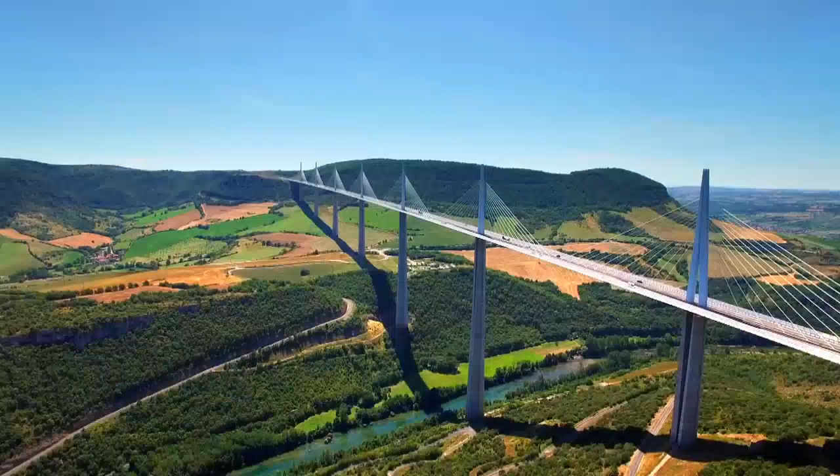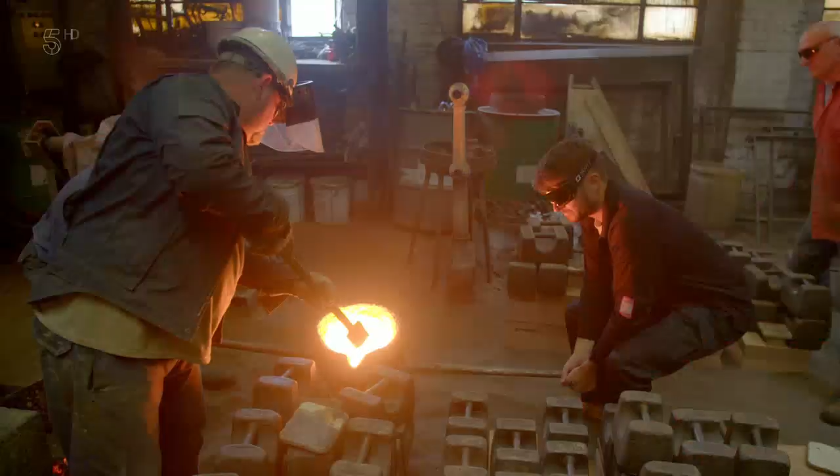Majestic, dramatic, awe-inspiring. These are the bridges that are worldwide icons, as well as engineering marvels. She's beautiful. Each of them broke new ground. The first, the biggest, the longest, and the tallest. I'm Rob Bell, an engineer, and I'm on a global adventure to discover how and why these magnificent structures were built, and to learn about the sweat and the sacrifice that went into their construction.

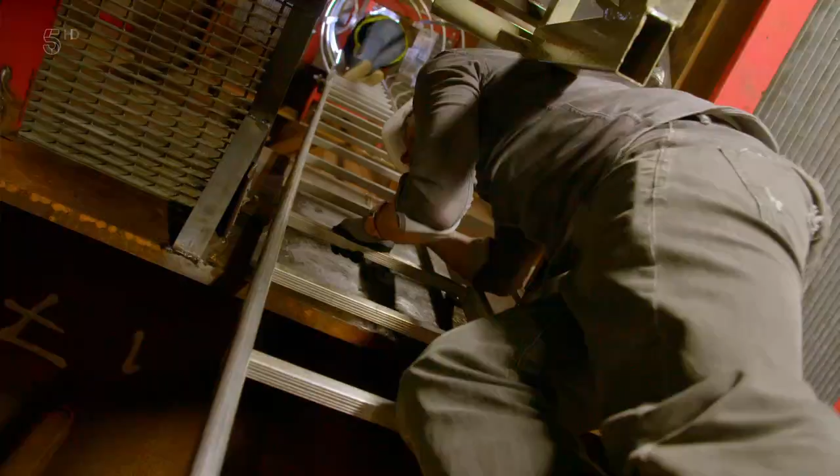Well, hey! I'm going to take you closer than ever before. Oh, this is magnificent. Inspect them from every conceivable angle. Oh, yeah. And meet the men and women who keep them working round the clock, no matter what. Check this out. These are the world's greatest bridges.

Sydney, Australia's oldest and largest city, and one of the world's most beautiful waterfronts. It's known as the Harbour City, and the very best way to arrive here has to be by boat, just as the first European settlers did some 230 years ago. Sail into the harbour and you'll pass two world-renowned structures, the Sydney Opera House and the Sydney Harbour Bridge.

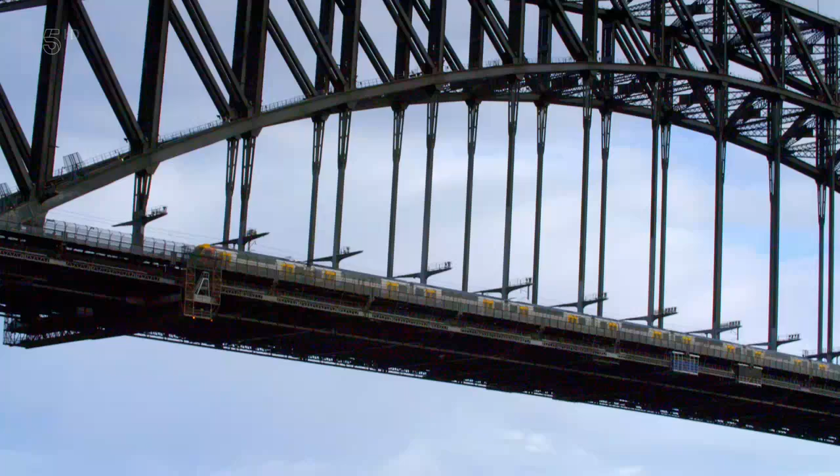Rising to a height of 440 feet, it's the world's tallest steel arch bridge, connecting the northern suburbs of Sydney with the city centre. It weighs more than 39,000 tonnes, spans 1,650 feet and is 160 feet wide. It carries 8 lanes of traffic, 2 railway lines, a footpath and a dedicated cycle path. Every day, more than 200,000 cars travel across it.

When it opened on the 19th of March 1932, it instantly became a world-renowned landmark. And since then, millions have passed across it, over it, and under it. Like a giant, triumphant gateway, it signals your arrival here into Australia. The bridge had taken a century from first proposal to completion. The construction itself lasted 8 years and cost £6 million. And its arrival marked a new stage in this young city's remarkable evolution.

Sydney was founded in 1788 when 11 British ships landed, right about here. On board were more than 1,000 settlers, including some 850 convicts. The captain described this as, without exception, the finest harbour in the world. He named it Port Jackson. Within 4 years of the first shipload, another 4,000 convicts arrived. They were followed by the first free settlers from Britain, who travelled here to make a new life.

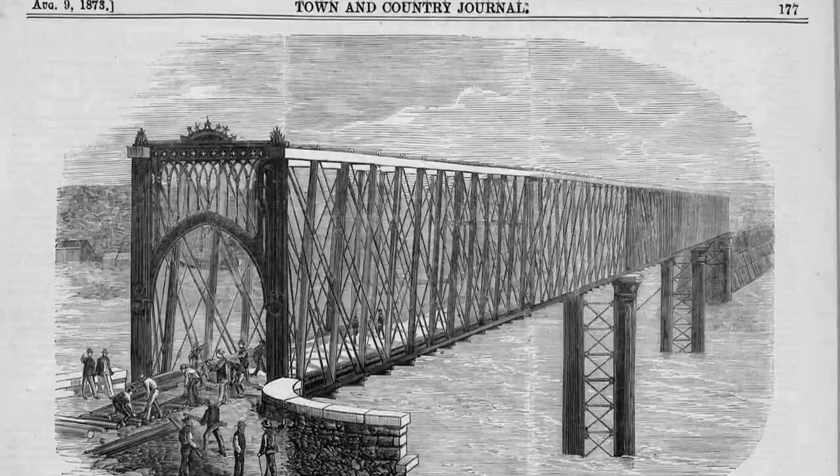This city's greatest natural transport advantage, its harbour, had become a transport disaster. The solution, everyone knew, was a bridge between the south and the North Shores. In fact, this wasn't a new idea. Throughout the 19th century, various bridge proposals had been submitted, but had all been rejected by successive governments. The designs were considered too fantastical, too unsightly, too much of a risk to shipping, or simply too expensive. But by 1900, a solution was needed urgently. So the government launched a worldwide competition to find the best design and construction plan.

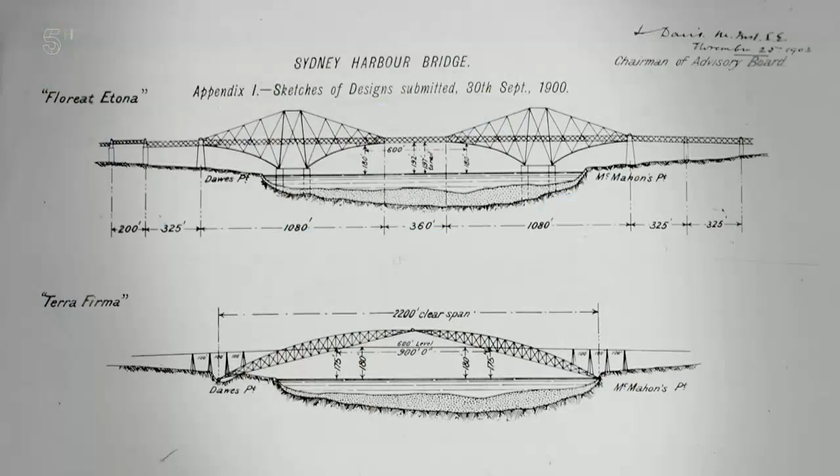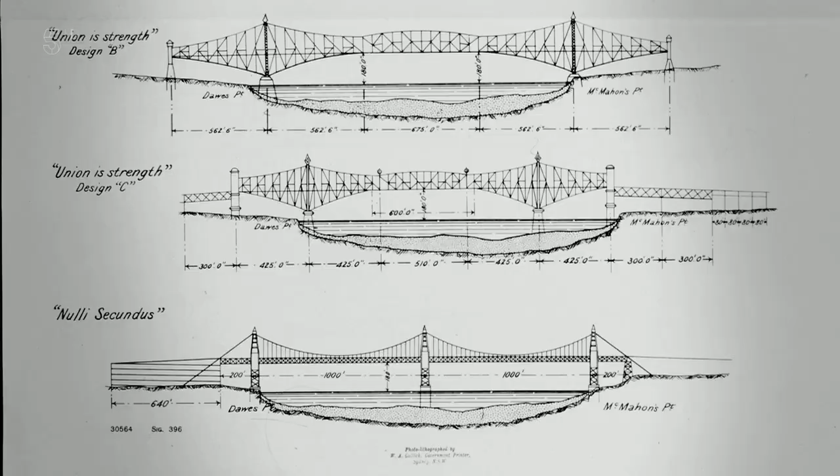30 of the top entries were put on public display here at the Queen Victoria building. Once a market, but now a smart and chic mall. But the judges deemed them all to be unsatisfactory and too lacking in detail. The only answer? A second competition, this time with a much more detailed brief. The bridge had to allow a clearance of 170 feet above the water. The main span needed to be 1,192 feet long, and the deck a minimum of 60 feet wide. It also needed to accommodate 2 railways, 2 roadways, 2 tram tracks, and 2 footpaths.

It was this submission from Norman Selfe that won in the end. A cantilever bridge, a design where the beams are anchored at just one end and supported by large towers. The judges advised the government that construction should start immediately and be completed within 5.5 years. But then a change of government brought the entire project to a grinding halt before it even got started. The designers were furious. Over a period of 3 years, they'd invested a huge amount of time and money into what they described as the Sydney Bridge guessing competition, and all for nothing. And much to the anger of the people, it was looking like Sydney Harbour would never get its bridge.

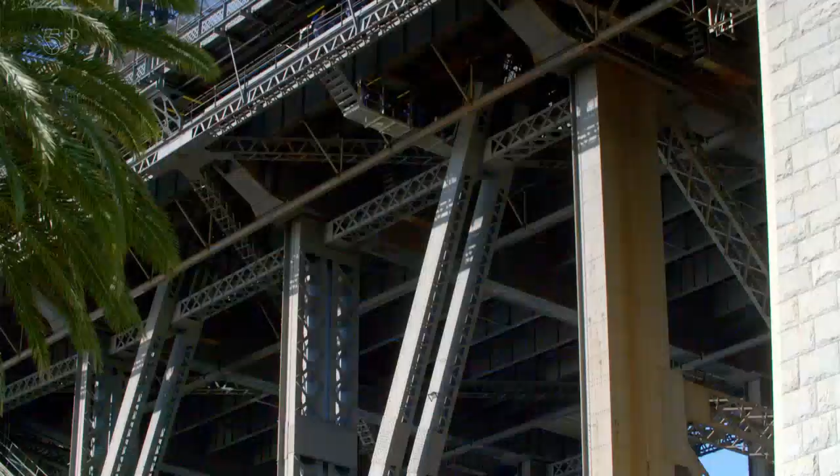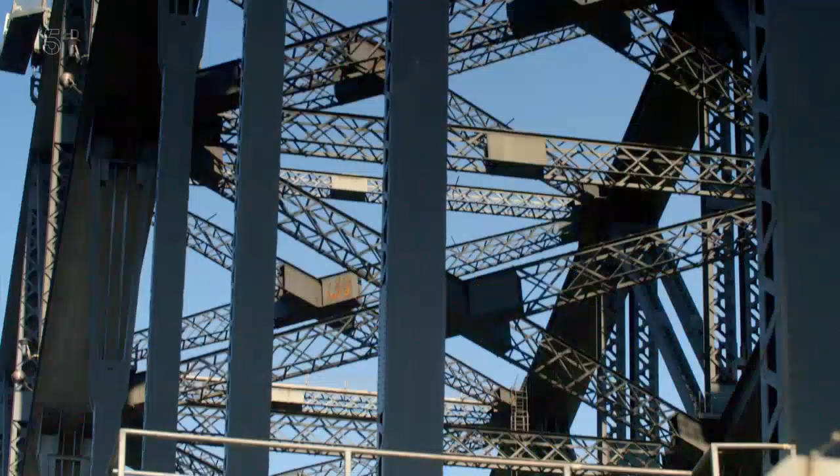The Sydney Harbour Bridge, once the highest man-made structure in Australia and still the most famous. Walking across, you get a real appreciation of the scale of what's here. But it's not just the size, it's solidly built too. And you get a real sense of that looking up. The width of the steel plates that make up the arches, all the truss work between the arches. Not to mention the imposing granite-faced pylons at each end.

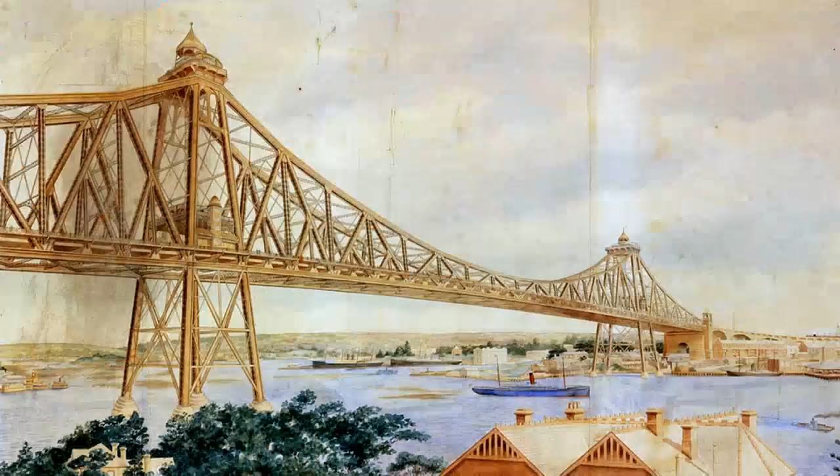It's seriously impressive. But at the beginning of the 20th century, it seemed unlikely this magnificent bridge was ever going to be built, as the project was hit by one delay after another. Norman Selfe's design, now more than 10 years old, was outdated, and following his death in 1911, the doors were left wide open for a new generation of bridge designers. The bridge we see and admire today might not have existed if it weren't for the drive and the determination of one man, John Jacob Crewe Bradfield. And even if it had gone ahead without his involvement, it would certainly have looked very different.

Bradfield began his career as a draftsman. In 1891, he joined the New South Wales Public Works Department and went to live on Sydney's North Shore. That meant travelling to work by ferry, so he understood commuters' demands for a bridge all too well. As an advising engineer on the abortive bridge design competition, he'd witnessed what a farce it had been. But in 1912, when the government took another look at building a bridge, he was determined to make it happen.

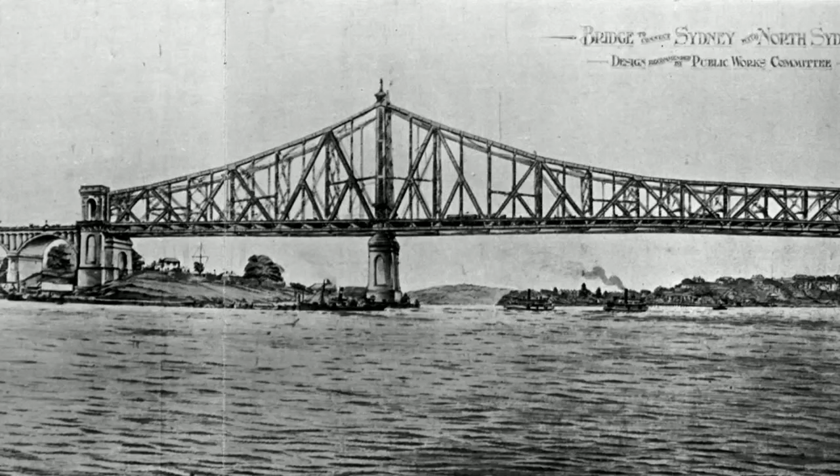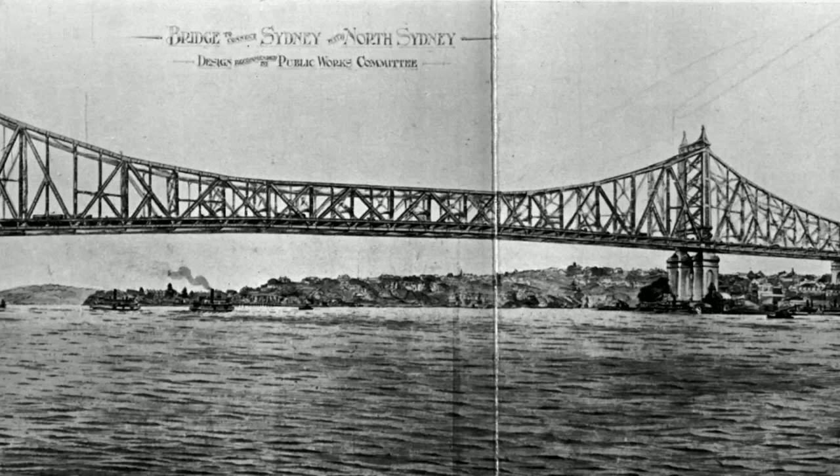After being appointed chief engineer of the Harbour Bridge and Metropolitan Railway construction, Bradfield submitted 2 designs himself. In 1913, one of these was accepted. It was a cantilever bridge, with each span built out sideways from huge piers. Steel trusses were to be used to give it strength and rigidity. Connecting Dawes Point on the south shore to Milson's Point on the north, it would carry 4 lines of railway, 2 roadways, and a footpath.

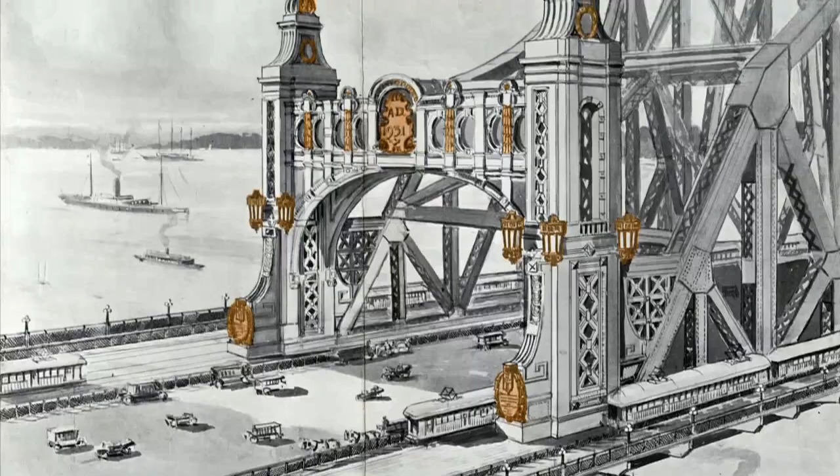Although still a cantilever design, it was far more ambitious than any past submission. The budget was agreed, the design was agreed, and the time frame was agreed. But then, the First World War broke out. The money for the project was diverted to the war effort, and once again, the bridge was cancelled. It was to take a further 8 years before the state government were once again in a position to consider Bradfield's proposal. Luckily for them, Bradfield was a patient and determined man, something his grandson Peter remembers well.

I think he knew how important it was to weld the city together, to get the east and the north and the south and the west together, and the bridge was absolutely essential. He was a visionary in many senses, always extremely meticulous in everything he did. He didn't have a localised view of things, he had a national view of things.

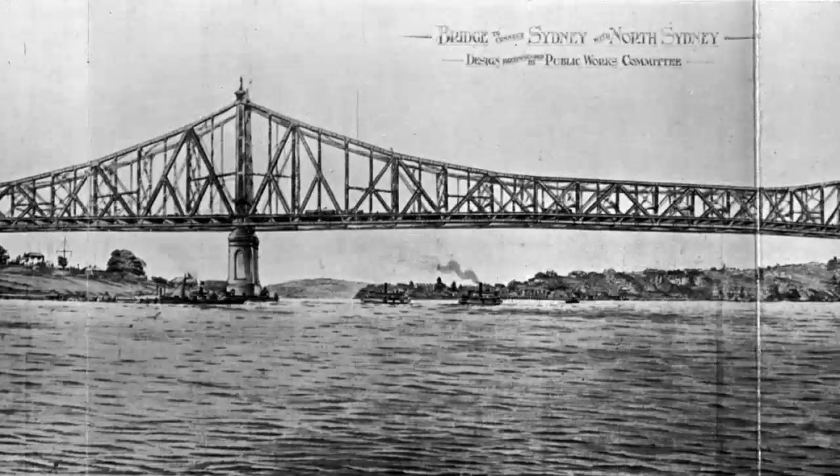So dedicated was Bradfield that he travelled the globe to meet the world's top bridge-building companies, learning all he could about the latest construction technologies and techniques. When he returned home, he was no longer wedded to his cantilever design. Instead, he asked the government to accept submissions for an arched bridge.

The main reason Bradfield changed his mind was a practical one. Arches are naturally incredibly strong, and engineers have been using them since ancient times. And nature's been using them even longer. Take this eggshell, for example, or half an eggshell. The shape of it creates a natural arch. And it's incredible for something so small and so thin, how much force it will take before it starts cracking.

Let me show you. Right. There we go. Well, it easily takes the weight of the tray, but let's load it up. Bottle of water here. Let's pop that on top. It easily takes the weight of 1 bottle of water. All right, let's try another one. 2 bottles of water, easy peasy. It's the arch that's taking all of that force. Because I'm trying to compress it, those forces pushing down are taken out through the sides of the arch, or through the structure of the eggshell, and into supports below, or the table in this case.

3rd bottle, let's have a look. 4th bottle, let's see what happens. Taking this up to 2.4, almost 2.5 kilograms of weight now. It's still staying strong. Let's try a 5th bottle. And this is going to take it up to 3 kilos. Will it take it? Our eggshell there took 5 bottles of water, but not quite the 6th. That's 3 kilograms of weight it could take, and all because of that arch shape. It's definitely smashed.

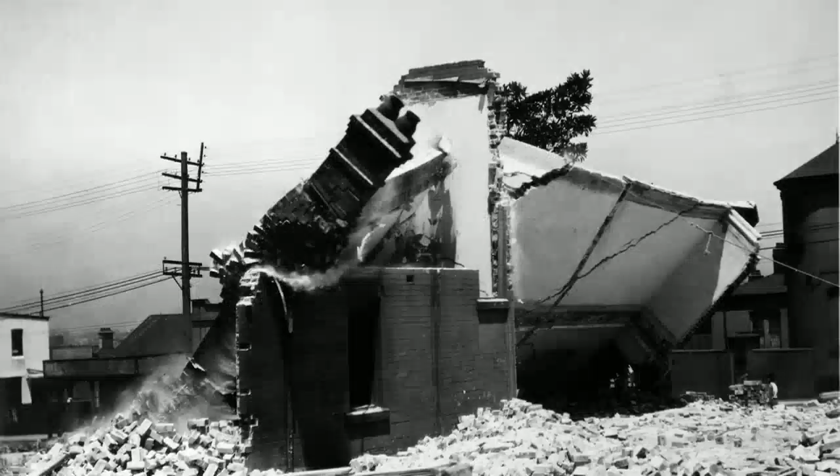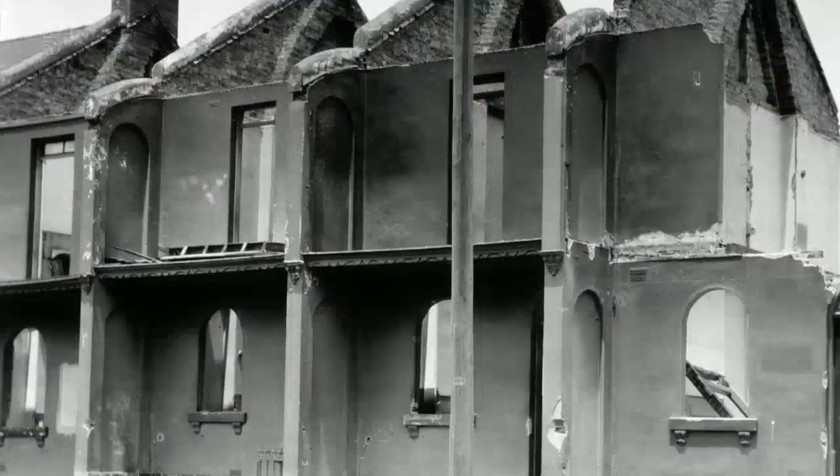Some people wrote letters to the government. This one's from a Mr. Lockhart, an 82-year-old who stood to lose his furniture business. He writes, "Dear Sir, my wife wrote some weeks ago RE compensation for loss of home and means of living. In reply, you stated that all the department could grant would be the cost of cartage. The amount is small, but would be very acceptable, as we have no means and are both too old to go out to work."

Another letter, this one from a Mrs. Pitcairn, a widow whose daughter taught music at home. She writes, "My one desire is sufficient to get a home again. Indeed, since we lost our home, we've had to sell many things for necessities to keep out of debt." She goes on, "Through the bridge, everything is taken from us. At this time, I had only one wish, to take my own life, and only my religion held me back."

Though some people in the government may have been sympathetic to these pleas, they were afraid of setting an expensive precedent. A blanket policy was laid out. There'd be no compensation.

Over on the South Shore, in an area called the Rocks, the residents had even less sway. It was this area where the poorer, less fortunate members of society made their homes, packed with tiny bars, brothels and hovels. The government wasted no time driving these residents from their homes before auctioning them off to building supply merchants who demolished them. When it came to the government's shiny new bridge, it was far more concerned with what it would look like than the effects on the local population.

Well, Bradfield had drummed up interest in the project during his round-the-world fact-finding tour, and he'd since received more than 20 designs from companies based in the United States, in Britain, in Canada, as well as here in Australia. And on the 24th of March, 1924, he made his decision. He awarded the contract to the English firm Dorman Long and Company and their consultant designer, Sir Ralph Freeman.

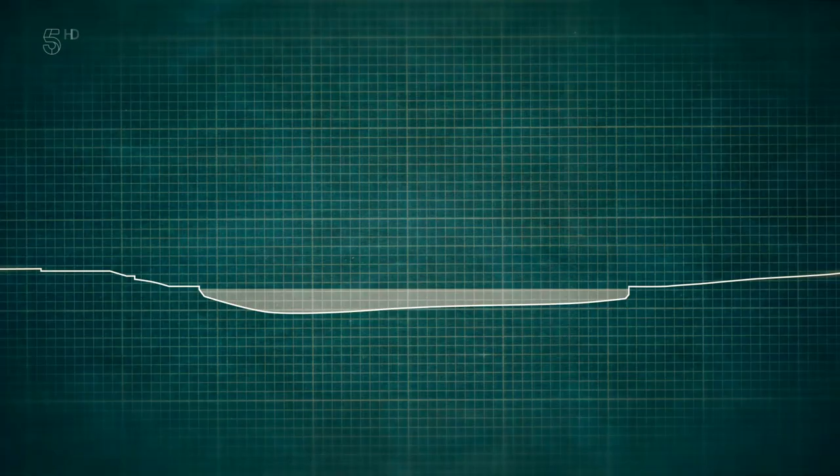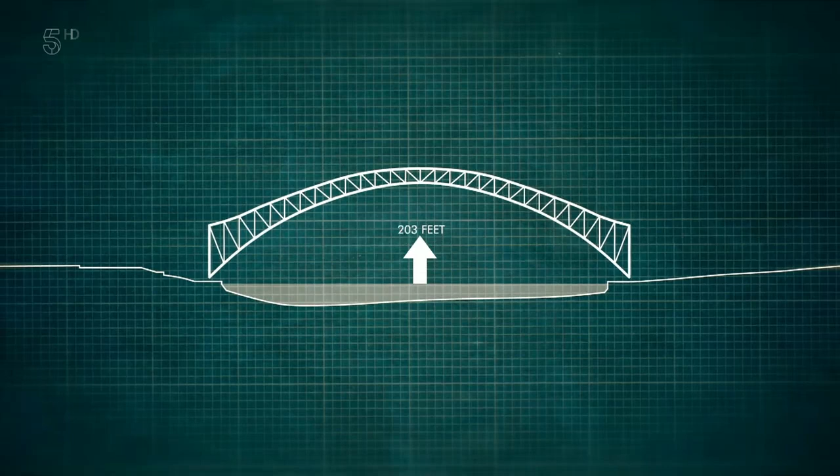Bridge A3, as it was known, would be the largest structure Australia had ever seen. It would be strong and it would look strong. And its granite-faced pylons here would, according to Bradfield anyway, give it an air of dignity. The design provided for a single great central arch spanning 1,650 feet, crossing Sydney Harbour from north to south in a single stride, and rising at its centre to a height of 440 feet.

From this, the trackway was suspended at an average height of 170 feet above sea level, passing off the arch at either end onto a series of 5 approach spans, formed of horizontal girder structures on granite piers. At 50,000 tons, this would be the world's heaviest structure. The steel sections, and even the rivets holding them together, would be the largest ever produced for a bridge project.

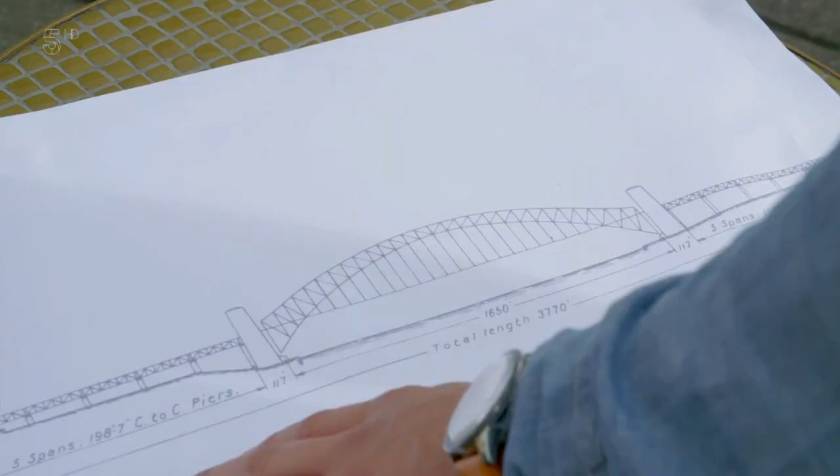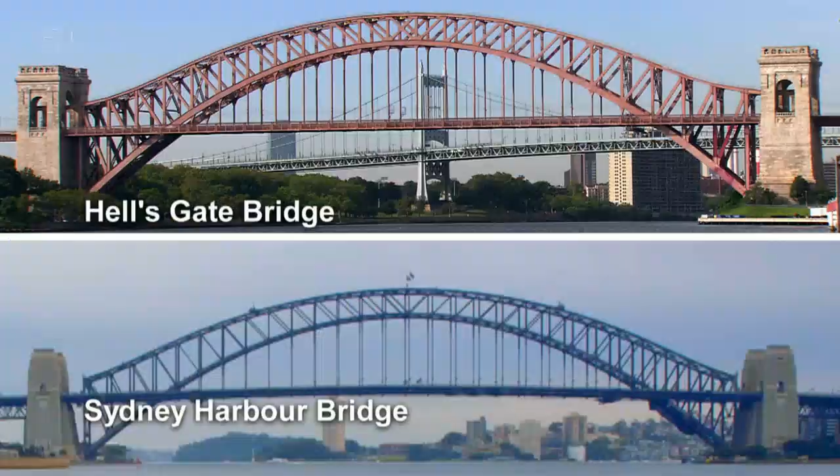20 years earlier, he'd considered an arched bridge to be a bit of an eyesore. But now he was a total convert and had completely ditched his original proposal of the cantilevered bridge. Bradfield had been won over to the steel-arched bridge design after seeing New York's Hell Gate Bridge. Built in 1916, it was the first steel arch to span 1,000 feet. Although only a fraction the size of the Sydney Harbour Bridge, they bear an uncanny resemblance, even down to the decorative stone pylons.

Bradfield estimated that the steel arch would cost £350,000 less than the cantilever bridge. And with new advances in steel, making it both lighter and stronger, the arch to Bradfield was becoming not just practical, but irresistible.

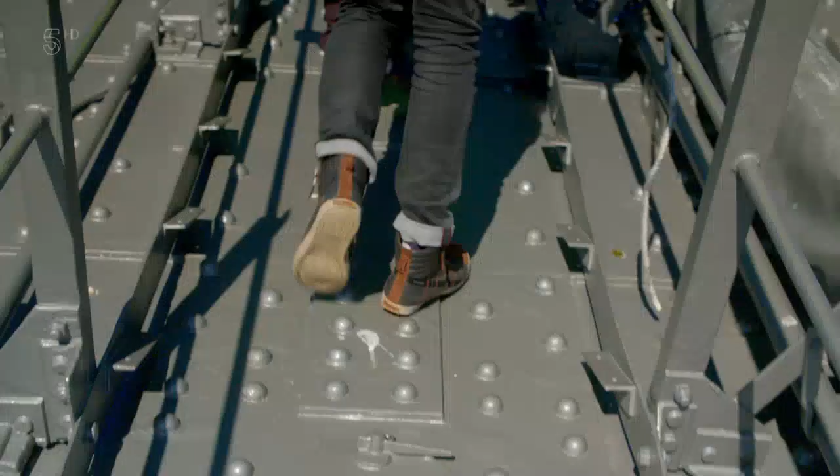Bradfield had approved the design by Dorman Long, and now the responsibility for getting it built largely fell to their English Director of Construction, Lawrence Ennis. During a 43-year career, he'd built bridges all over the world. For this latest project, he moved to Australia, describing it as the most difficult he'd ever encountered.

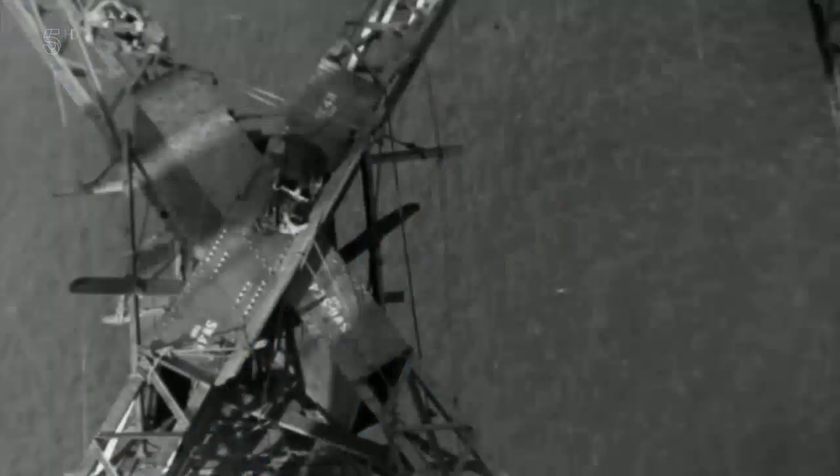His task was Herculean. It would take 5 years before construction of the giant steel arch even got underway. Before that, there were plans to be drawn up, workshops and machinery to be built, and granite to be quarried. And eventually, once the work began, there would be those that would give their lives for the bridge.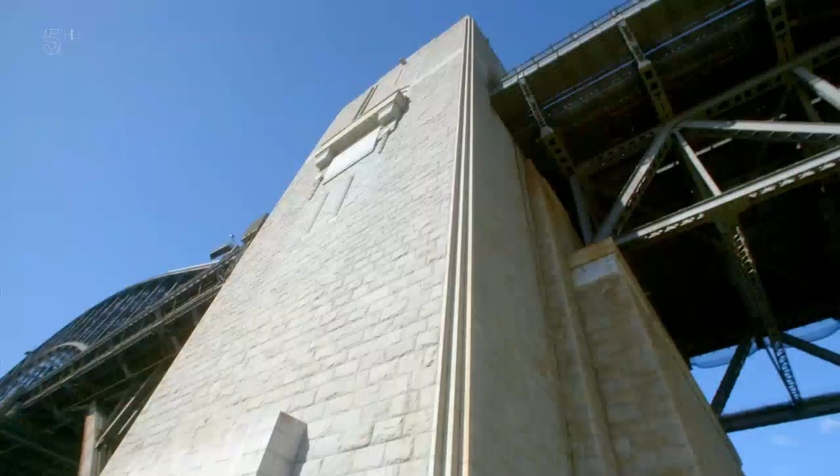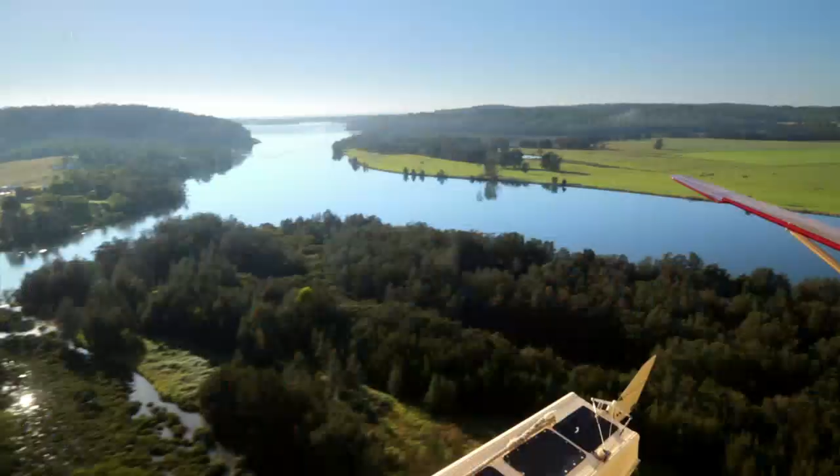290 feet high, they don't actually serve any structural purpose. But Bradfield insisted on them because they made the bridge look reassuringly sturdy. The first step was finding a nearby granite quarry accessible from Sydney. And what better way to look at what they found than from the air?

The granite itself came from just down there, at a place called Moruya, about 200 miles south of Sydney by sea. It's been quarried here since 1850, and it was once described as the best granite outside of Aberdeen. An incredible 9,000 square kilometres of Australia's southeastern coast is made up of granite. So why did they choose Moruya above all the other sites? Well, the answer was quantity, quality, and ease of access to the Moruya River.

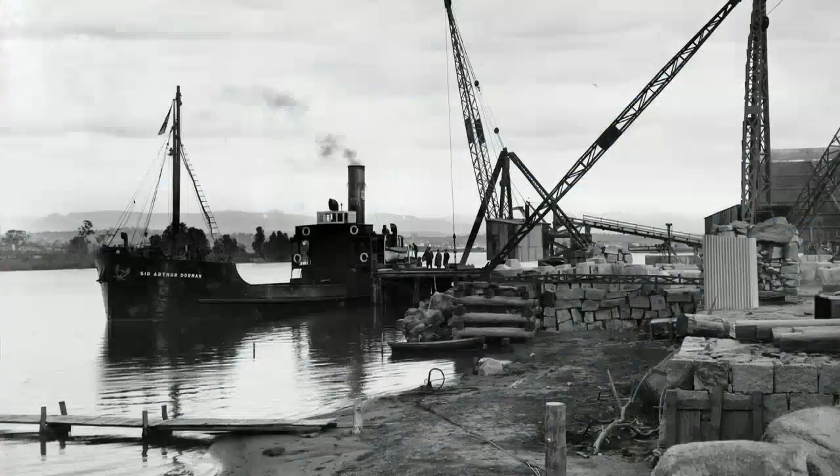3 steamships were built specially to transport the rock down the river and then across the sea to Sydney. But first, it had to be mined. At the time, Moruya was a tiny community, and they didn't have the necessary skilled manpower. So Dorman Long went on a recruitment drive. John Gilmore was one of the workers they signed up. In 1924, he, along with his wife Mary and their 9 children, moved from Scotland out to Moruya.

The work was hard and the hours long, but soon a bustling community was established next to the quarry in an area that became known as Granite Town. At its height then, roughly how many people would have been living here in Granite Town? Over 300. At the height of the works too, there were 64 children at the school. So paint a picture for me then. What would we have seen here in Granite Town if we had been here back then?

There were 72 cottages made of timber. There were bachelors' quarters for the single men. There was a post office, a cooperative store, a school and a hall. So this became its own community then, did it? Yes. They would enjoy social activities in the hall. So practically every Saturday night it was the place to be. They'd have concerts. The Italians had a band, and the Scottish enjoyed the dancing.

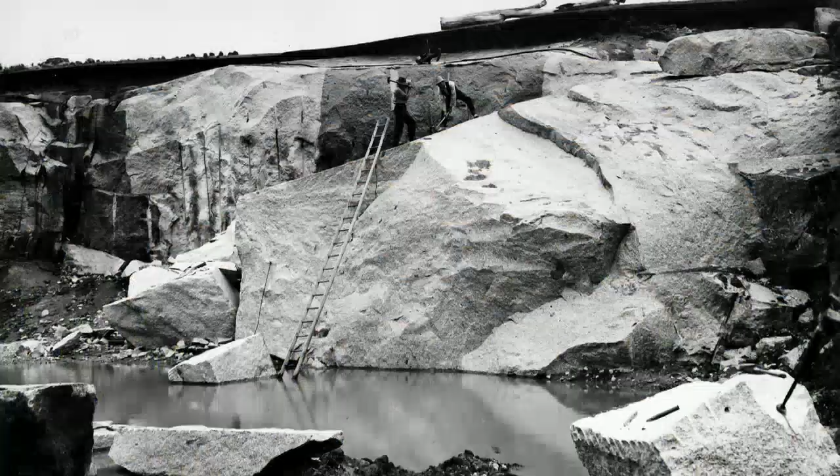And then the quarry itself was quite nearby, was it? Yes, just over there. It's just over that hill. Yes, it's really close by. Very close by. When they would blast the rock away from the quarry face, there are memoirs of people recording things falling off shelves. Really? Because of the vibrations? Yes. It's this very same quarry which provided the Sydney Harbour Bridge with around 50,000 tonnes of numbered stones. Each one dug, shaped and then shipped to their destination 200 miles north.

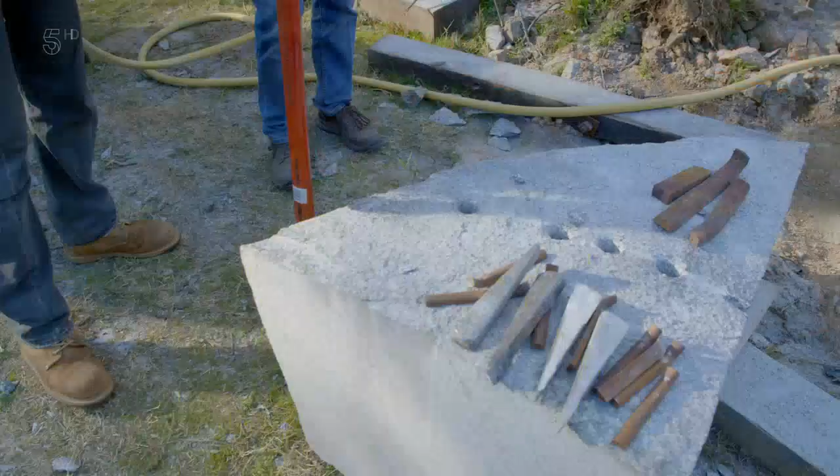And whilst I'm here, I can't resist trying my hand at a bit of stonemasonry. What were the techniques those quarrymen were using to get the granite so beautiful and so pristine for the Sydney Harbour Bridge? Once they'd produced that large block from the quarry face, they moved it out as far as they could and then started cutting it up into smaller blocks using feathers and wedges. We've got a bit of a demonstration set up for you on a smaller section of stone.

OK. So holes would have been drilled in the line where you wanted to cause the split, and the feathers and wedges, or feathers and plugs, go into the hole. OK. And a wedge would fit between them. So the idea was, the feathers sit down in the hole that you've drilled, and then as you drive the wedge through, you can see what happens there. The feathers get separated, and ideally that's separating the rock on each side of it. That's right. The feathers and the wedge are designed so that there's equal pressure on both sides.

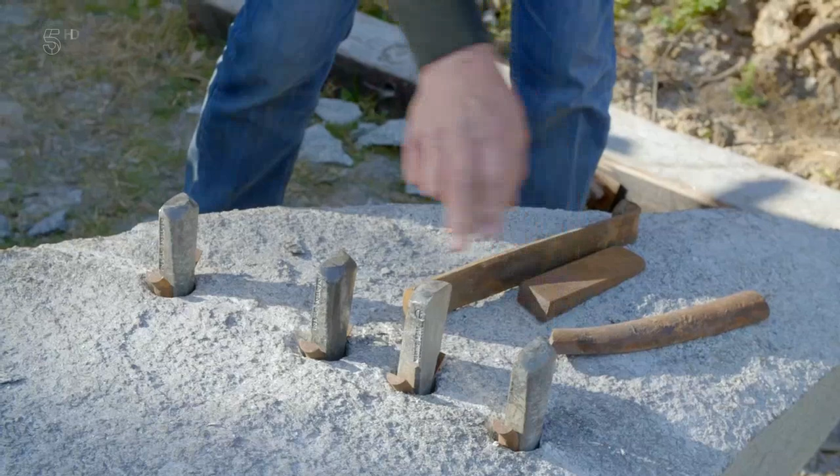So we've got our feathers and wedges all nicely lined up along the line we want to split the rock. Is it brute force now? Yeah, it's brute force now. Just remember, a few taps on each one, about the same strength, go along to each one and then come back again. OK. And keep on doing that process until it splits. I'm actually quite excited to see if I can split this enormous chunk of granite with what is a relatively small tool, but done the right way, fingers crossed. Right, let's give it a shot.

That's not too hard? No, that's OK, good. So this feels like it is quite a nice, delicate process, actually. So then I come back through. Yes. Well, hey! Has that gone all the way through? Yes. It's definitely started. Let's have a look. Yeah. Whoa, look at that.

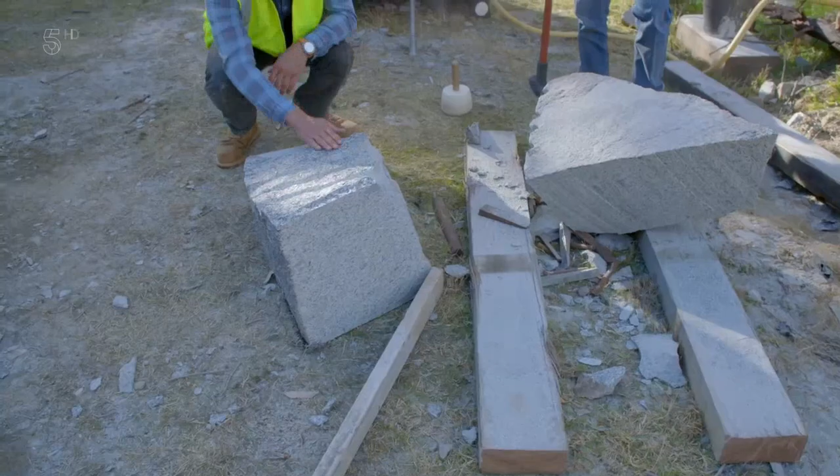Look at that. And look at this beautiful, clean granite. So that's the finish that I imagine Bradfield looked at and said, yeah, that's the finish that I want to see on that pylon. Really, it wouldn't have needed much more work than that on a nice, clean split. Yeah, if you can get it exactly right for all the bridge work. I mean, that is stunning, though. I'm so pleased with that.

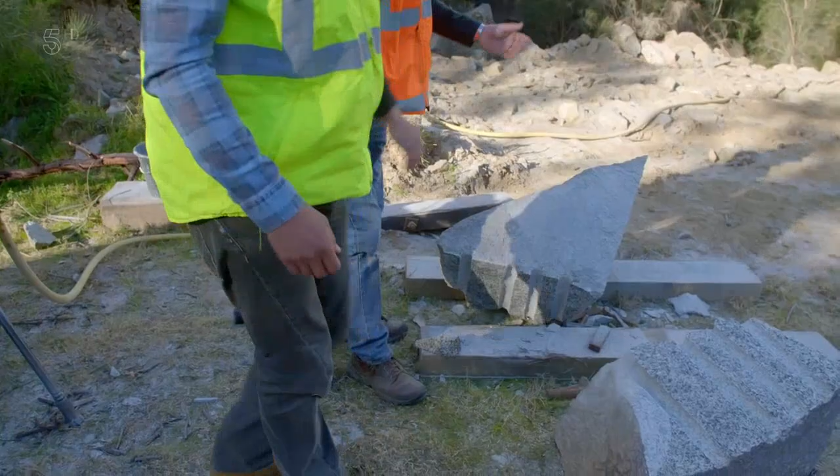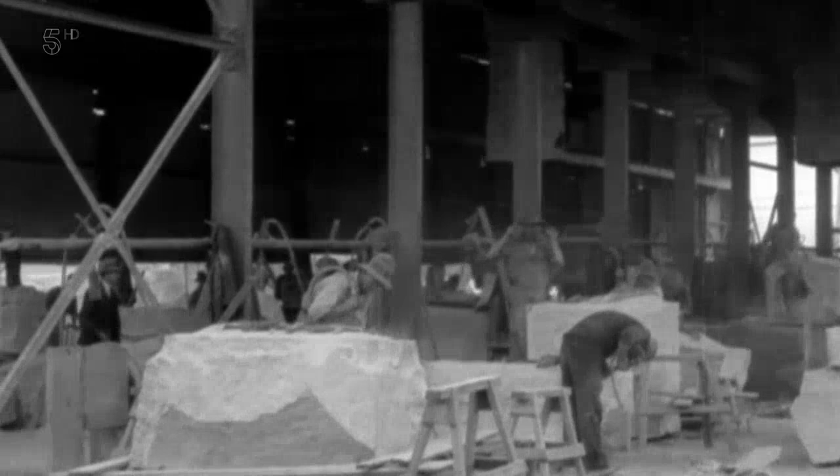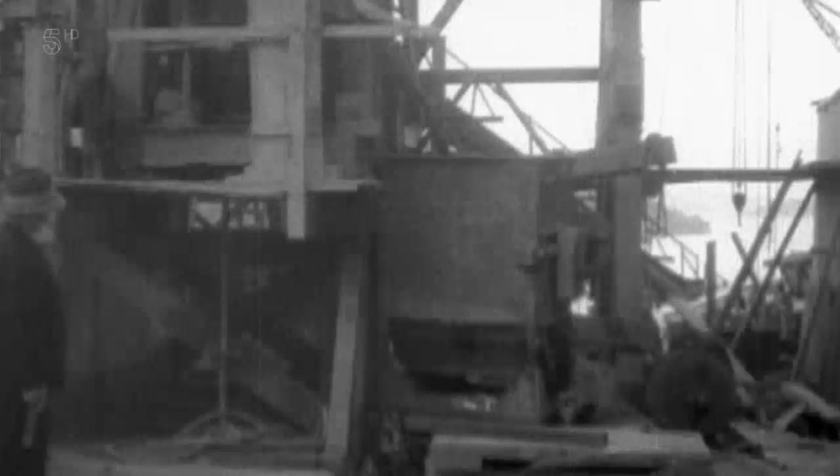Over 7 years, a total of 173,000 blocks of stone were produced this way, each of them hewn, cut, dressed, and arranged into position like a giant jigsaw puzzle before their shipment. The quarry also provided the bridge builders with a further 18,000 cubic metres of finished stone and 200,000 yards of crushed stone for use in the concrete foundations. Foundations on which the bridge could finally take shape.

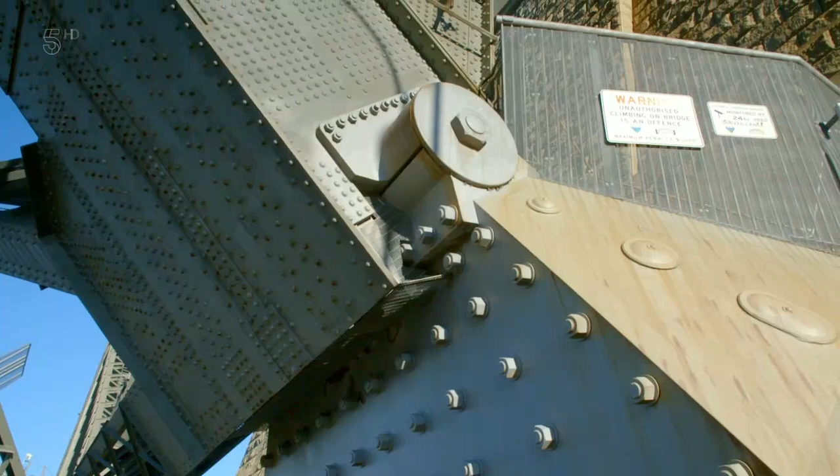Now, the bridge starts and finishes, rises and falls here from this super-sized hinge. Now, there are 4 of these in total, 2 on this side and another 2 on the other side. And you need the flexibility of these hinges. You couldn't have it locked down into the concrete foundation, not just because of the phenomenal winds that blow through here, but also because of the way the steel expands and contracts in the Australian sun.

On a really hot day here, the arch can rise an incredible 18 centimetres. Without these hinges, there'd just be too much stress on the steel, causing it to bend and buckle and eventually fail. As well as expansion, a steel bridge of this size exerts a weight of around 20,000 tonnes on each hinge. So the hinges had to be built on top of huge angled foundations.

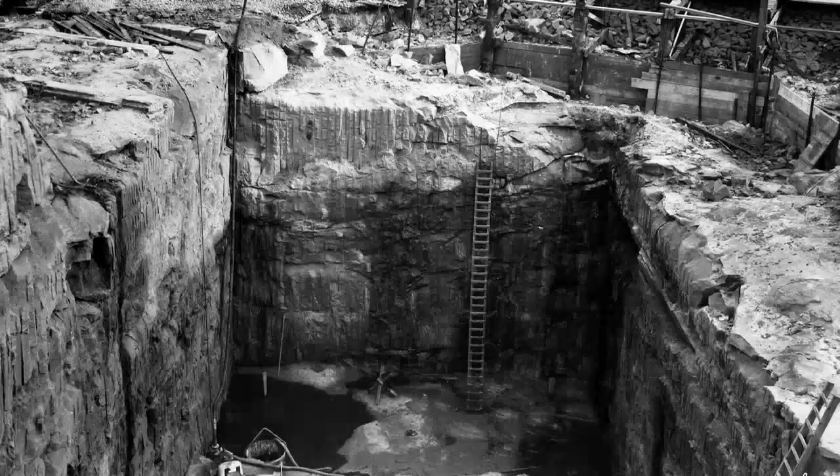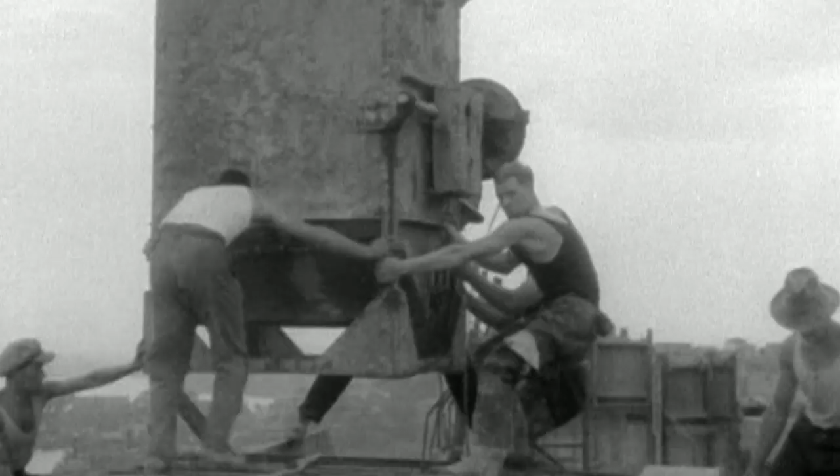Work on these foundations began in 1926. 4 large holes, 39 feet deep, were dug and then filled with a special concrete mix. In order to bear the enormous load of the bridge without cracking, the concrete had to be laid in one continuous 14-hour pour. Once the foundations and hinges were in place, work could begin on these, the towers or pylons, each of them encased in the granite from Moruya. And only then could they finally begin construction of the arch across the harbour.

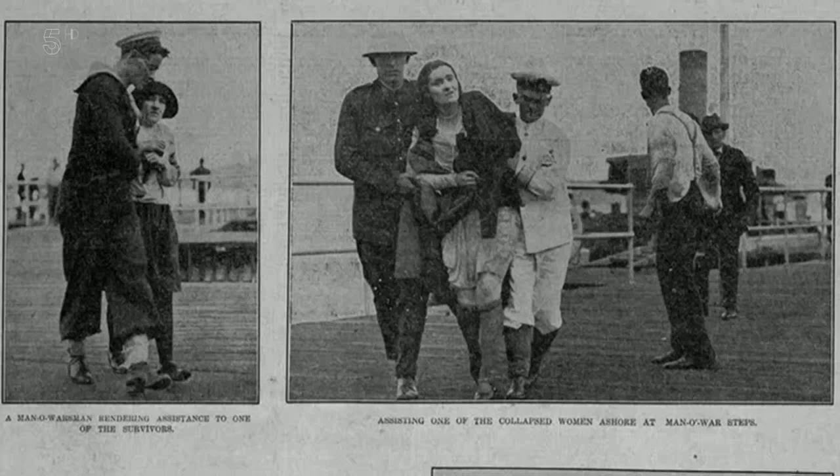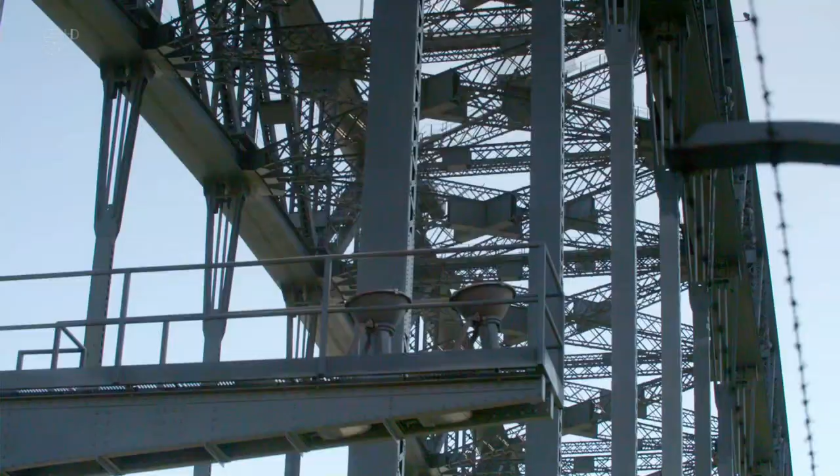And not before time. By 1928, this stretch of water was dangerously crowded. A few months earlier, a ferry full of schoolchildren collided with a steamship. It sank immediately and 40 people drowned. For the people of Sydney, the bridge couldn't come soon enough. But there were still big challenges ahead, not least how to support the arch as it was built across the deep waters of the harbour.

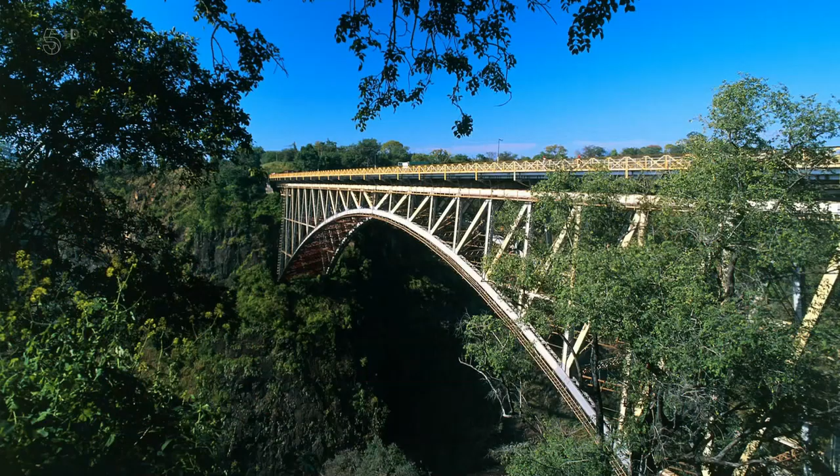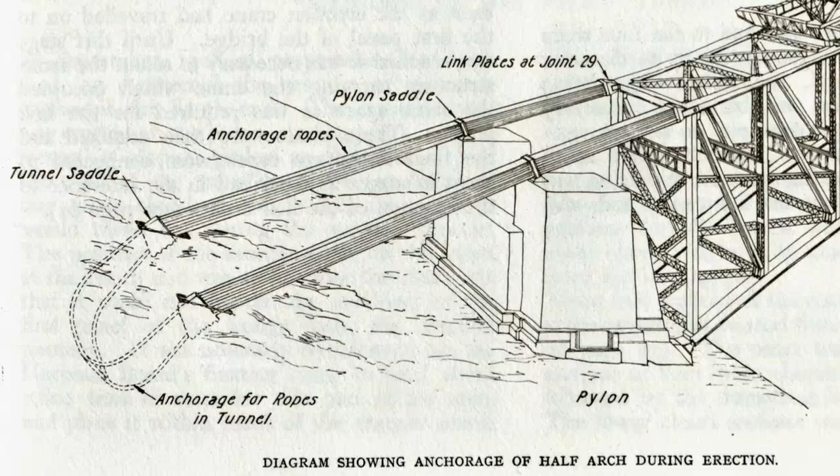The task fell to Dorman Long's consultant designer, Ralph Freeman, a long-standing expert in this field. Until the 2 ends of the arch being built from the north and south shores had extended enough to meet in the middle, Freeman needed a way to support the weight of all that steel sticking out from the land. The answer came from the famous Zambezi River arched bridge beneath Victoria Falls, which Freeman helped build in 1905. In order for the arch to be built across the deep ravine, Freeman devised a system using thick steel cables anchored in place to hold the arch up on both sides whilst it was constructed. A method he now intended to use with the Sydney Harbour Bridge.

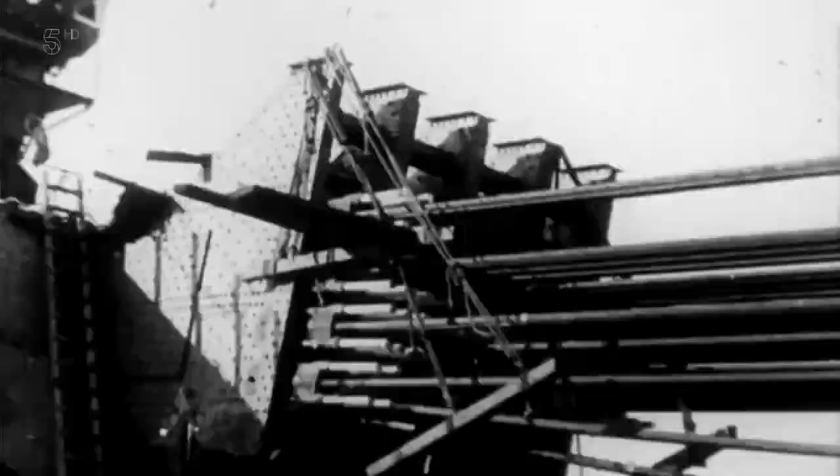The cables ran down through these iron pipes, which are fixed into this concrete saddle, before heading down into a tunnel 40 metres deep and being pinned into the ground. Just as the foundations and hinges are critical today for the bridge to stand up, this saddle, the tunnel, and all 1,600 miles of steel cable were essential during its construction. Although the 2 sides of the arch were worked on simultaneously, the southern end was built slightly ahead of the northern end to detect any errors and help with alignment.

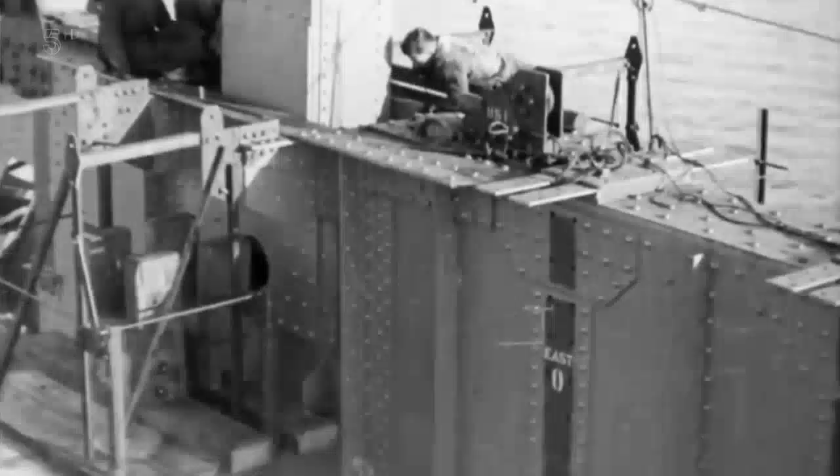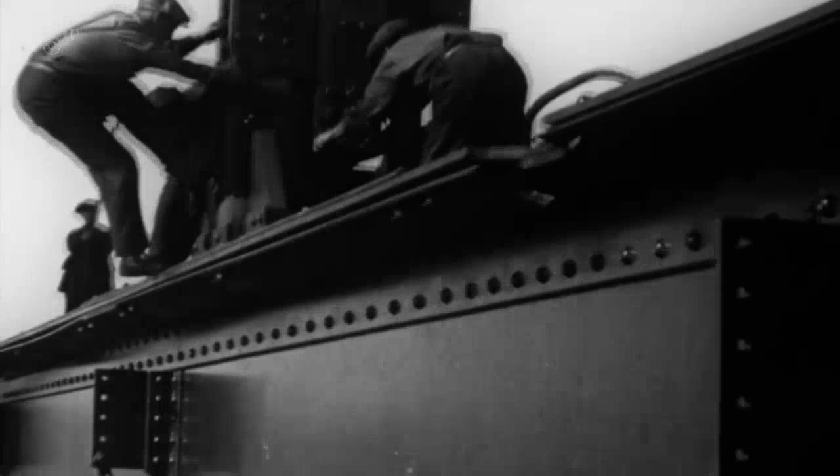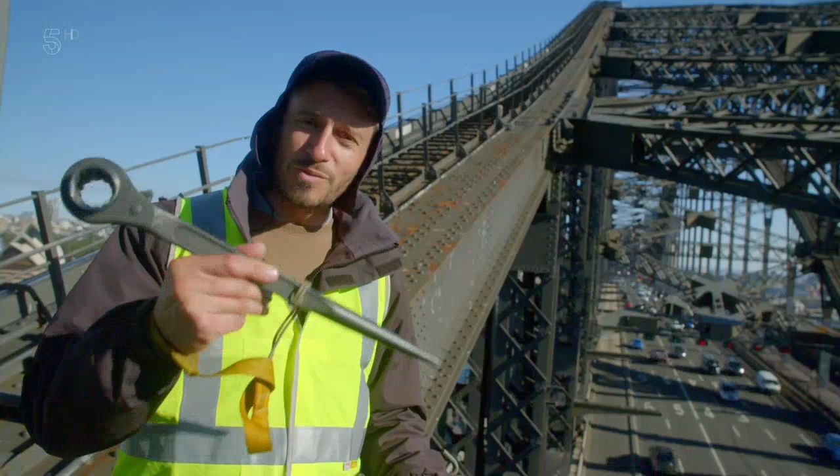The steel girders were hauled from barges by 2 specially built creeper cranes, each weighing 575 tons. As they put a new panel into place, they crept out onto it to put the next section in. Assembling the bridge was a mammoth task, involving some 1,400 riveters, boilermakers, steel constructors, and riggers every year. The work was hard, and it was hot. It was also dangerous. There were no handrails or steps like there are today. Instead, men would climb up on the rivets, or using one of these so-called podgers, a kind of pointy-end spanner that they'd jam into the rivet holes and use as hand and footholds, a bit like mountaineers.

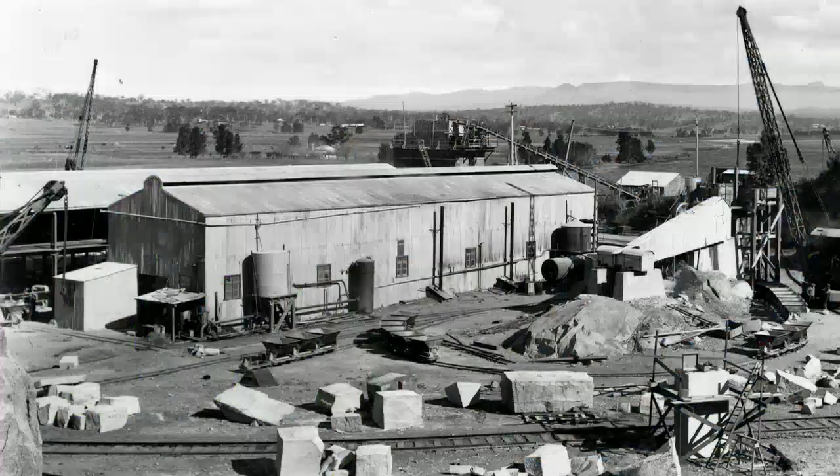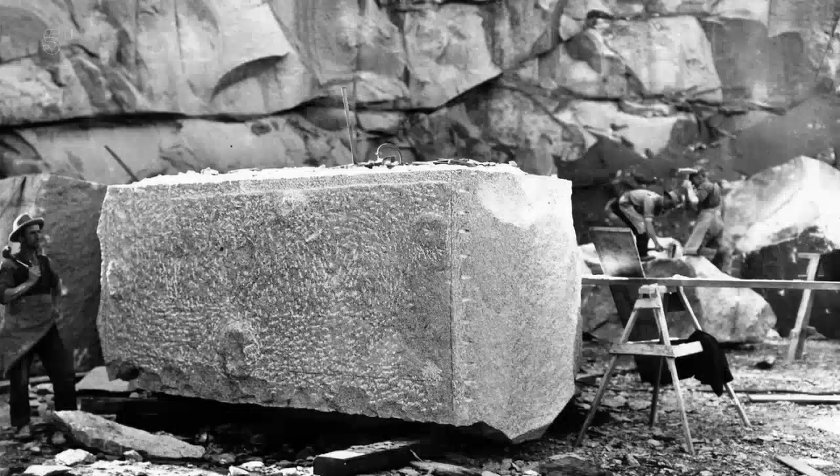But even before the arches had left the ground, 7 men had lost their lives. The first 2 recorded deaths were at the Moruya granite quarry. The earliest was in April 1926. A man was sitting on the body of a crane when it swung round and severed his leg. The second came less than a year later, when a large block of granite toppled from a ledge, crushing one of the workmen below against the quarry wall, killing him. In all, 16 men gave their lives building this bridge. Nearly all of them were killed as a result of construction accidents. Only 2 died falling from this steel arch.

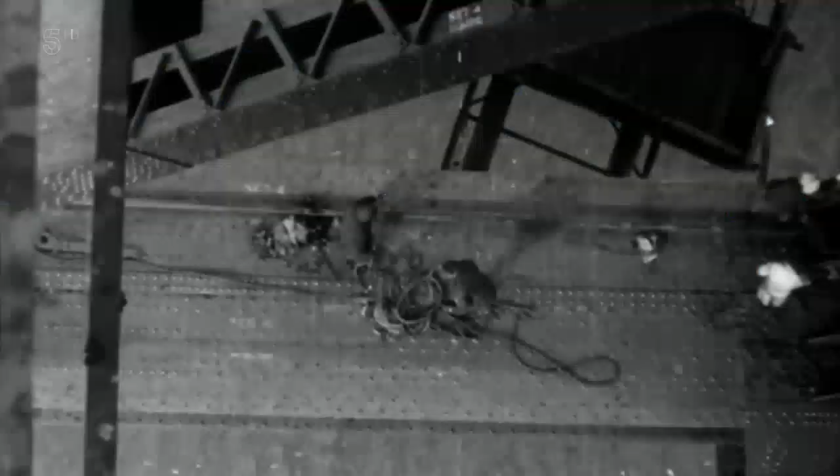But amongst the deaths, there were also some incredibly lucky escapes. The most celebrated involved that of a riveter named Vince Kelly. Vince was working on the road deck level, about 150 feet above the water, fixing rivets with his powerful pneumatic gun, when he slipped and fell off the platform. As an experienced diver, he instinctively knew his best chances of cheating death were by straightening his body, pointing his toes and raising his arms above his head.

By turning himself into a kind of human spear, he'd reduce the impact as he hit the water at more than 80 miles an hour. But still, his chances of survival were less than 1 in 10. Remarkably, Vince's technique worked, and he did survive, breaking 6 ribs but otherwise none the worse when plucked from the river. For his extraordinary feat of survival, he was awarded a special commemorative gold medal.

Despite the risks, the bridge would become a lifesaver for many others. Before the 1929 Wall Street crash, which sent the world's economy spiralling into depression, unemployment here in Australia was already 10%. Afterwards, it more than doubled. But this construction project continued to provide job opportunities to men who otherwise may have become destitute. It kept on breathing life into the city. So much so, it was given the nickname, the Iron Lung.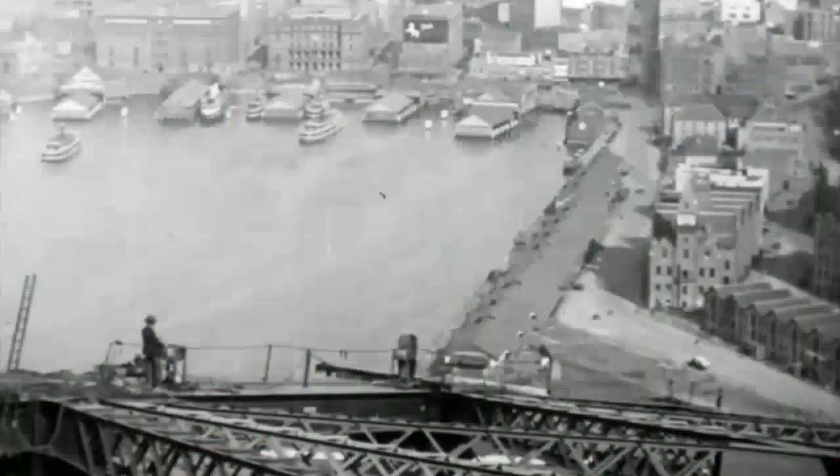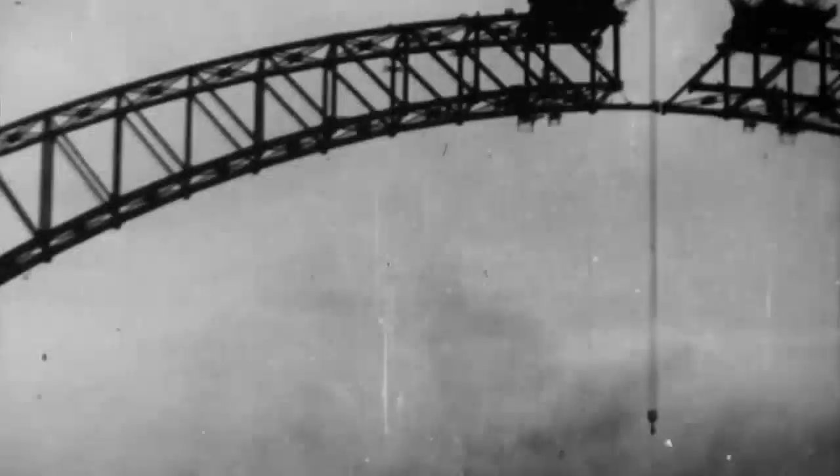As the economy worsened, working hours were cut so more men could be employed. In such desperate times, seeing the arch gradually stretch across the harbour, the 2 sides getting closer and closer, gave Australians something to be proud of. Finally, on the 19th of August 1930, the 2 halves of the arch touched for the first time, right here in the middle of the bridge. It'd only taken 2 years since the start of construction, but at long last, Sydney North and Sydney South were united.

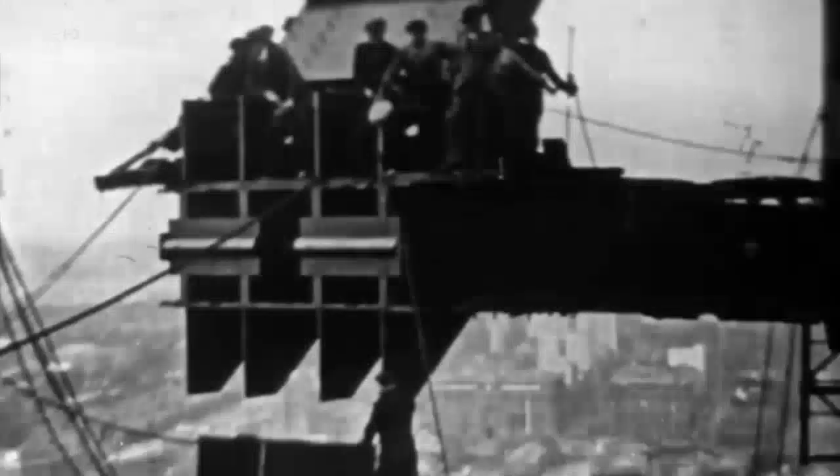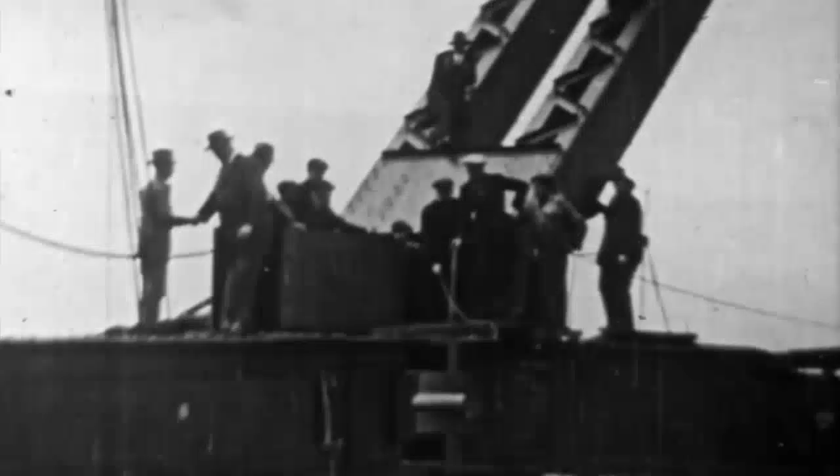Up high on the bridge, Bradfield and Freeman joined Lawrence Ennis, the man who'd overseen the day-to-day management of the construction. It was Ennis who made the first crossing from south to north, along the lower chord of the arch, 400 feet above the water. It would be another 2 years before the deck was fitted and the bridge declared open to the public. But in private, a feud was simmering between 2 of its key players, Bradfield and Freeman, which would soon explode into bitter and open warfare.

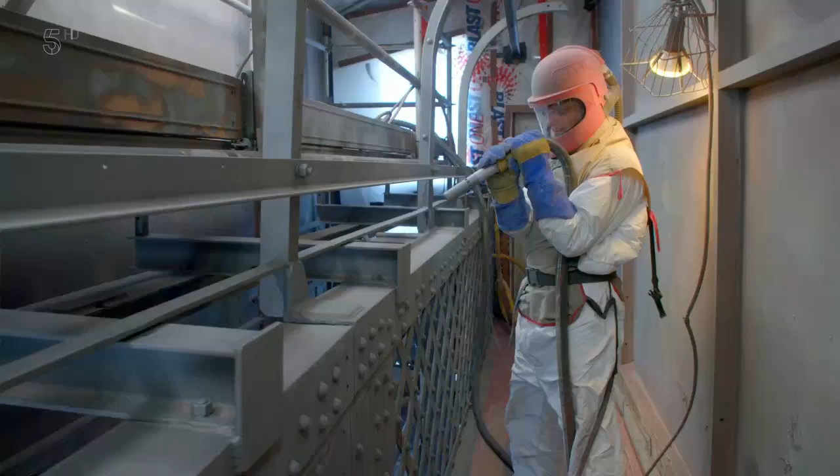Before the world-famous Harbour Bridge, there were 2 Sydneys. After it, there was only one, united by a monumental arch that rose above the water and the rooftops. When completed in 1932, it brought together 300,000 residents on the North Shore with another 600,000 on the south. Today, the population of Sydney is in excess of 5 million, and over 1 million vehicles cross the bridge every week. To cope with this relentlessly heavy use, a large team work round the clock to ensure that the 485,000 square metres of steelwork remains properly maintained.

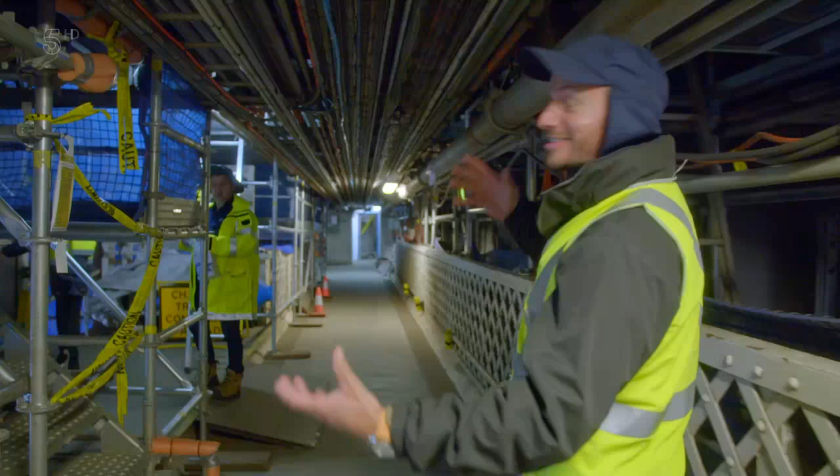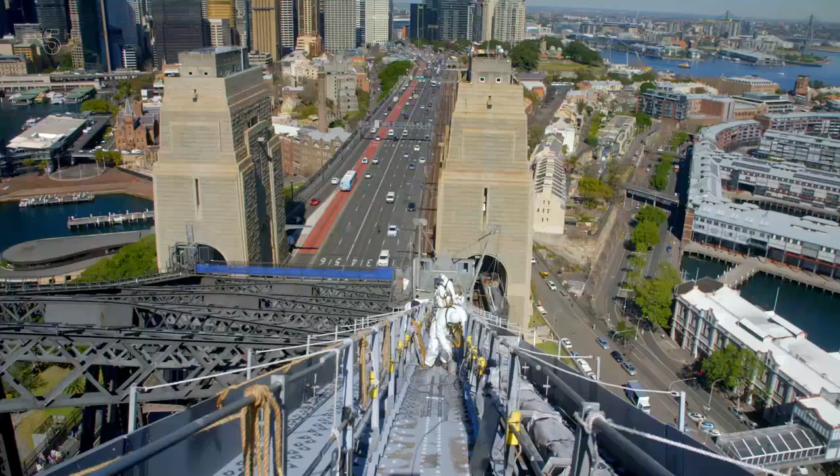I just love getting in behind the skin of these giant structures. This is where you learn how the whole thing lives. Part of the maintenance program includes repainting the exposed steel sections every 5 years. A team of specialist painters used 30,000 litres of bespoke Sydney Harbour Bridge grey paint just to complete one coat. There's, I think, 6 million rivets on this Sydney Harbour Bridge. We've got about 85, 90 maintenance workers, which includes painters, riggers, carpenters, boilermakers, and it's still not enough.

Back in the late 1920s, concerns over the bridge's future maintenance couldn't have been further from people's minds, as controversy over who actually designed the bridge was gaining momentum. John Bradfield, the chief engineer, had without doubt been the driving force in getting it built, and it was his proposal that the government had finally accepted. Ralph Freeman, the consultant engineer for Dorman Long, felt he was entitled to at least equal credit. He'd produced all the detailed plans, calculations and drawings, as well as providing the solution for supporting the arch during its construction. But this had all been done under the close scrutiny of Bradfield.

Grandfather spent hundreds and hundreds of hours and a team of people checking every calculation that the contractors did and signing off on every calculation that was done for the bridge. The bridge wouldn't be built unless Grandfather had been there from day one, and he was. It was a 30-year project, and the bridge is where it is today, why it's there today, in the form it's there today, because of his overall supervision.

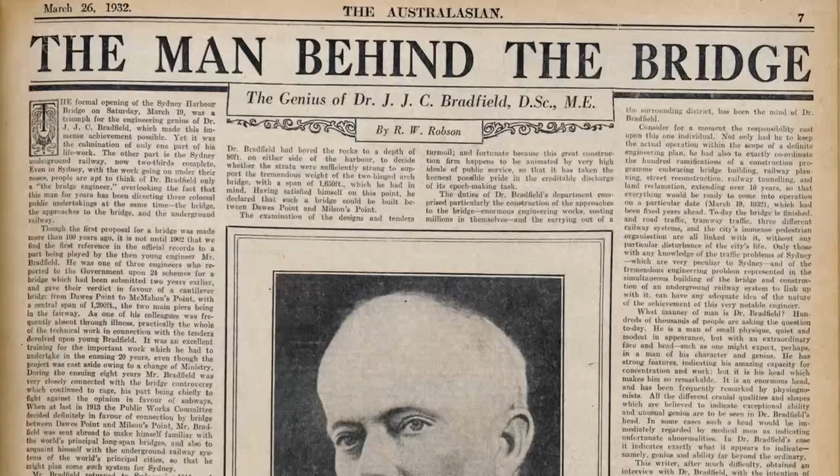Even during the final stages of construction, Bradfield was ever present. He appeared in all the official photographs and wrote articles for the public and engineering community. To the world, he was the designer of the Sydney Harbour Bridge. Freeman wanted recognition of his own, so he wrote to Bradfield, pointing out that he'd been working on the design since 1921, and added, "I ask you to use your influence as far as you can to prevent publication of the statement that the design of the bridge is yours."

He went on further and demanded that "I would personally like it to be known that the designs of the bridge submitted with Dorman Long's tender were prepared under my direction." A polite but strong request.

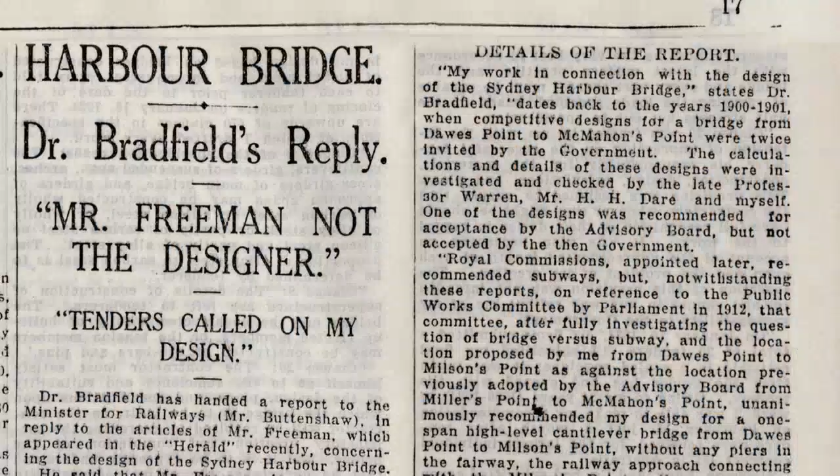Bradfield was unsympathetic. He replied, "We're producing between us the steelwork of a structure of worldwide significance, the details of which are prepared by you, but are subject to my revision before approval." And he went on, "Your request that I should proclaim that the design is yours would be incorrect if construed in any sense." When Freeman sailed from England to Australia in 1929, he confronted Bradfield, who refused to back down.

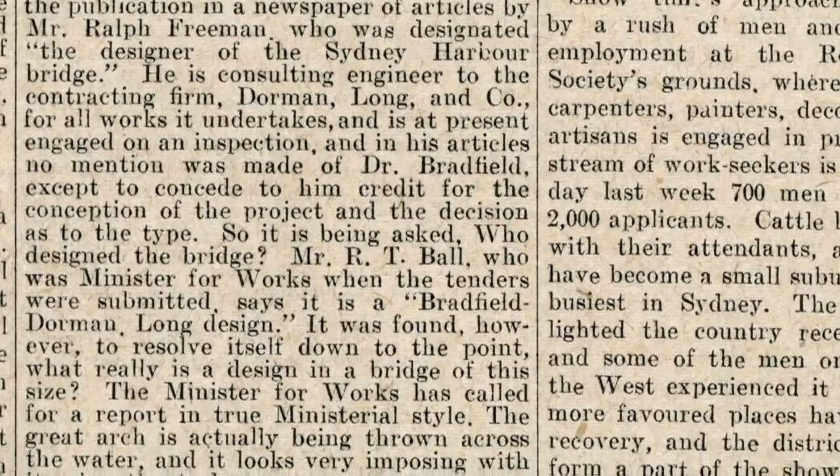An exasperated Freeman went to the papers. When the story broke in the Sydney Morning Herald, it was a scandal. Freeman's claims were astonishing. For years, Australians had celebrated Bradfield as the designer of their bridge. Now some unknown Englishman had come along trying to steal the glory, not just from a local hero, but from

their country itself. Neither man would back down, both of them taking to the press to state their claims and attack each other. In fact, the argument became so heated, the Institution of Civil Engineers threatened them both with expulsion should the so-called newspaper controversies continue. As the argument raged, the workers on the ground got on with what really mattered, the actual building.

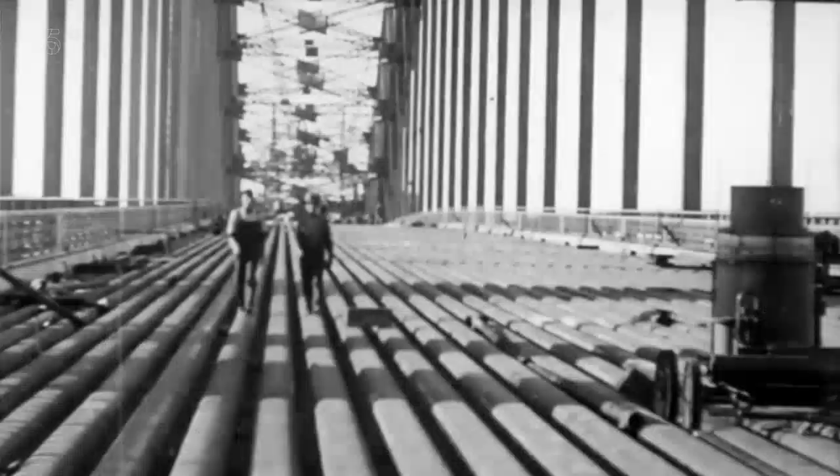When the arch was complete, the creeper cranes worked their way back down, constructing the roadway and other parts of the bridge from the centre out. Horizontal crossbeams were attached to vertical hangers which hung from the arch above. The deck for the roadway and railway, over 3,772 feet long, was built on top of the crossbeams, with the deck itself being completed by June 1931.

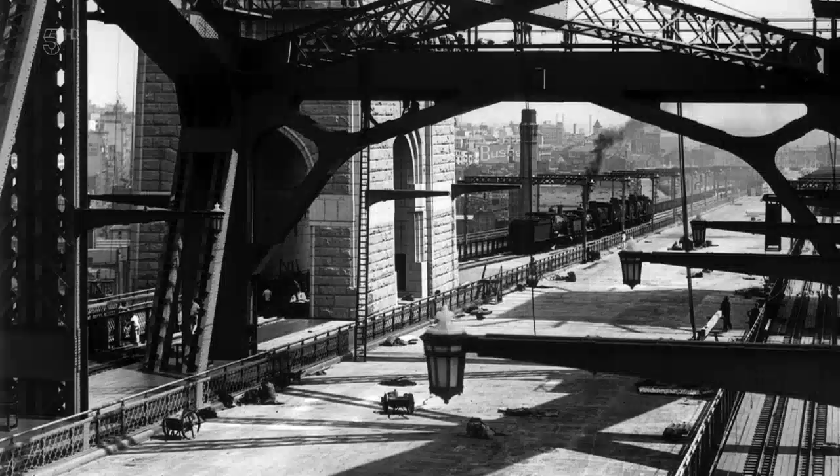Rails for trains and trams were laid, and the road was surfaced using concrete topped with asphalt. Power and telephone lines and water, gas and drainage pipes were also all added to the bridge in 1931. And on the 19th of January 1932, construction came to an end. 3 weeks of testing followed, including load testing using 96 steam engines positioned end to end.

This bridge is so incredibly strong. Even if every roadway, every railway and footpath was completely rammed, it'd happily take it. It's been tested to withstand a 100-mile-an-hour hurricane and a temperature variation of 120 degrees. In March 1932, it was finally ready for its grand opening.

The dispute over who designed it rumbled on. In the end, a compromise was reached. As the plaque here says, the general design and specification were prepared and the whole supervised on behalf of the Government of New South Wales by JJC Bradfield. Freeman's name's also included. Here, look, Ralph Freeman, as consulting and designing engineer for the contractors. The plaque gives future generations the chance to acknowledge the hard work of both men, a point not lost on

Bradfield's grandson. I think the thing that's clear, and grandfather recognised this, was that not one person could build the bridge on his own. I mean, the bridge involved a huge amount of determination, ingenuity, engineering excellence, and not one person could provide all those things all the time. But I think that he has the most claim to say that the design was his, but Freeman's role can't be ignored.